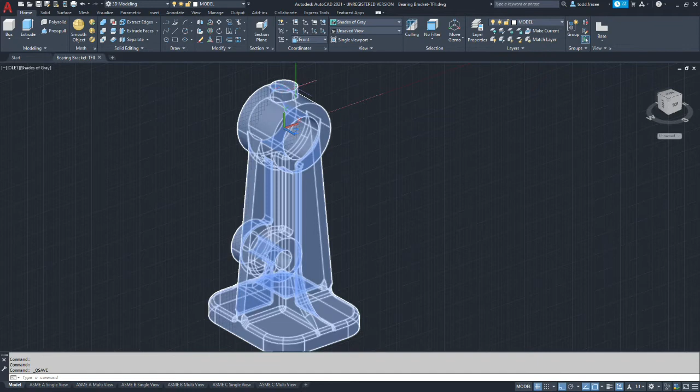Okay, so there are two things we could do. Well, three - we have three sets of features to do before we complete this. There's a hole that goes in the top of this boss, and there's a series of 4 holes in the base plate. And there should be a fillet running around the transition.

I believe I'm going to finish the holes first and address that fillet last, and then we'll do one last attempt at the fillets on the outside. And if we're not able to successfully do that, we're unfortunately going to need to chalk it up as a calculation error in this version of the software, and I won't be taking points off.

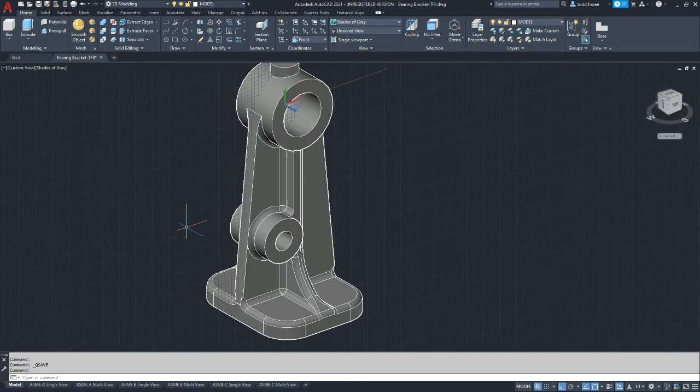Again, we want to be able to describe the part in their different views. So as I have it now, those aren't critical fillets to describe the part in 2 dimensions. The fillet up here on the boss is. So, all right.

Let's finish putting holes in. So the working plane needs to change. We're going to go to top, and I'm going to work on the hole in the boss.

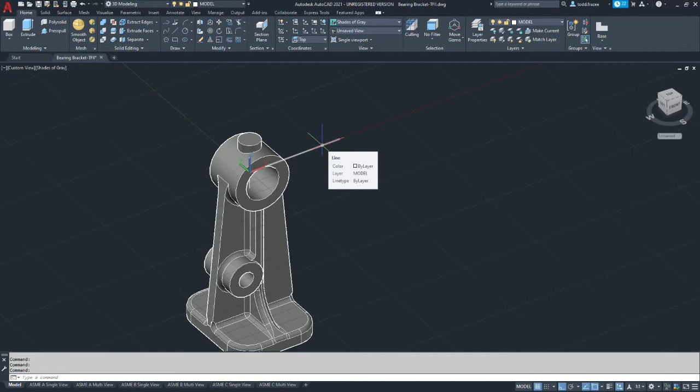Now, it's a threaded hole. It appears it's a threaded hole in the original drawing, but I noticed that the original call out has been just changed to an 8 millimeter diameter hole, so that's what we're going to treat that as. But graphically, it looks like it's a threaded hole. We're going to be covering threaded holes later in the semester.

So, all right, same procedure as what we've done before. We're going to take a circle, and we're going to make sure our object snap is on so we can pick up on the center of the boss. And I prefer to go to diameters, and it's 8 millimeters.

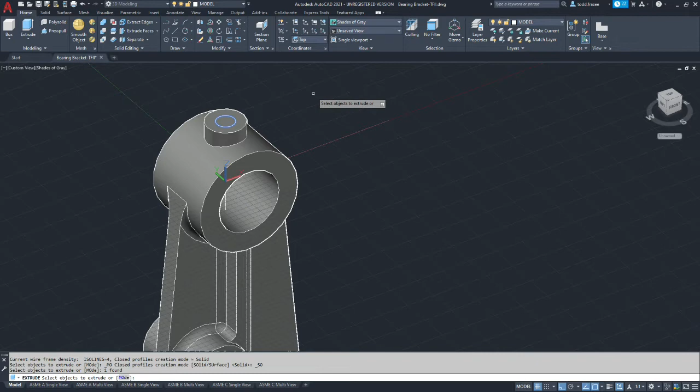Okay, and then we're going to extrude the circle we just made. This isn't critical, it just needs to go all the way through. It's probably for a set screw, so I'm just going to drag it through the part so I can see it go through into the cavity there.

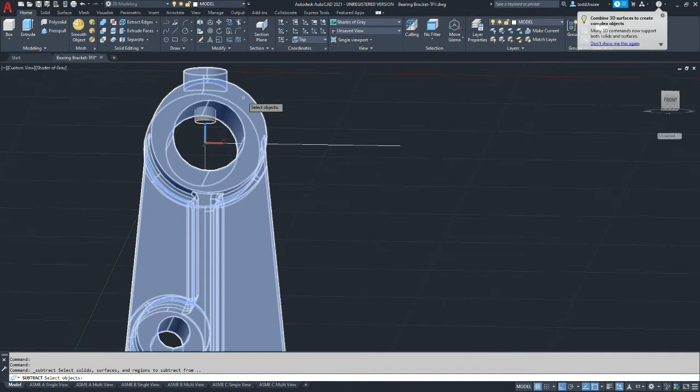We're going to go subtract. We're going to select the solid we want to keep, and we're going to hit enter, and we're going to select the solid we want to remove, and we're left with a through hole. All right, let's go work on the bottom.

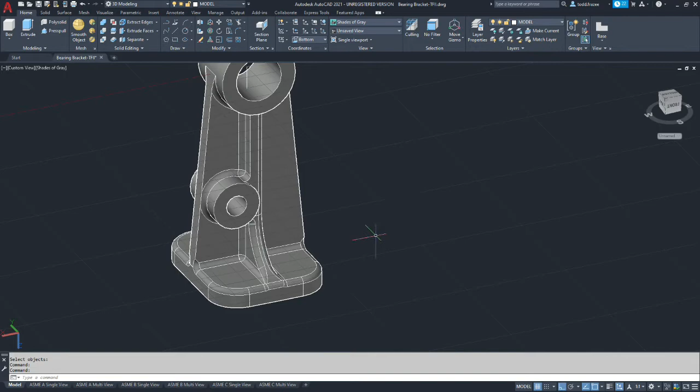Now you can actually switch to the bottom view if you want, or you can operate in the top view. It's semantics on projection, but I would prefer to look at it from the bottom of the base.

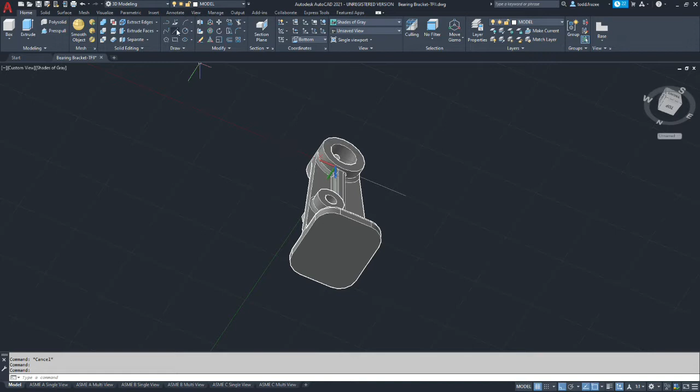We're going to turn on our object snap. We're going to make sure our object snap is on midpoint. We're going to go from midpoint to midpoint, and midpoint to midpoint on the base. Okay, so make sure it's snapped to the model, otherwise your dimensions are going to be off.

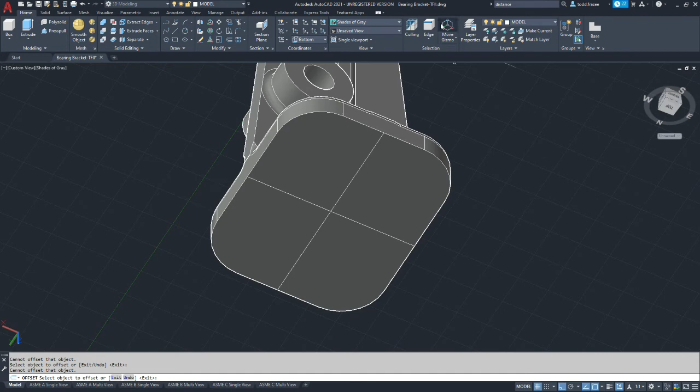Okay, I'm going to switch to wireframe mode. Going to offset. It's 23 millimeters is the offset. So we're going to offset in the shorter direction both ways. And then we're going to exit offset.

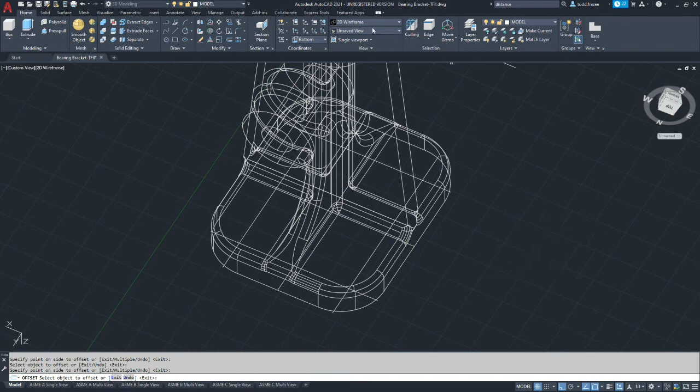We're going to go back in and we're going to set the dimension at 29 and offset the other line that we created in both directions. And in shaded view, this is what we should have. So the intersections of this rectangle that we've created should be the centers of our 8mm holes.

Alright, so on your object snaps, we want to make sure that we have intersection selected. I'm going to deselect midpoints so we don't accidentally get midpoints, and that should be good for now. We'll see how that works. So we'll go to circle, and we want the intersection, first intersection, and we're going to go to diameters, and our diameter is 8. And we repeat that same procedure.

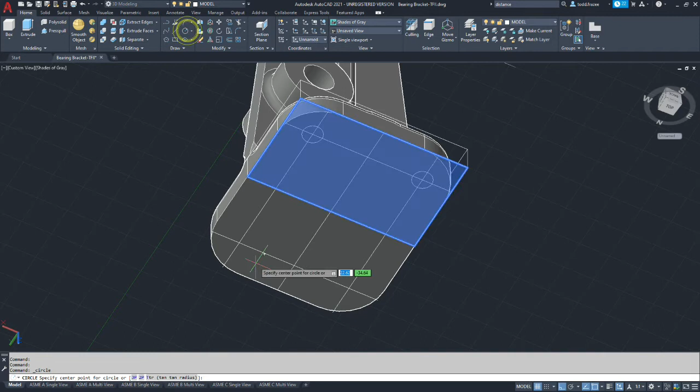All right, so we have our 4 circles. Now for house cleaning, I'm just going to go ahead and remove the extra geometry.

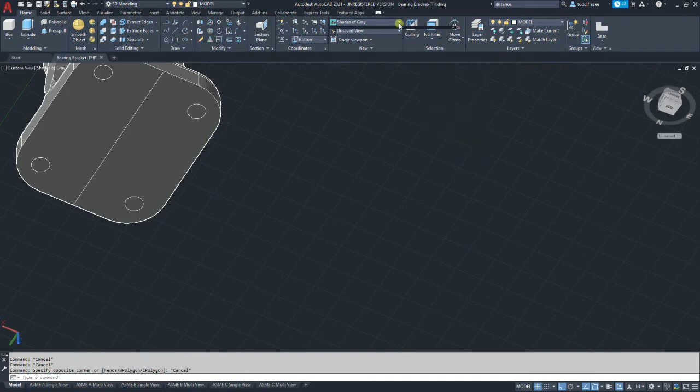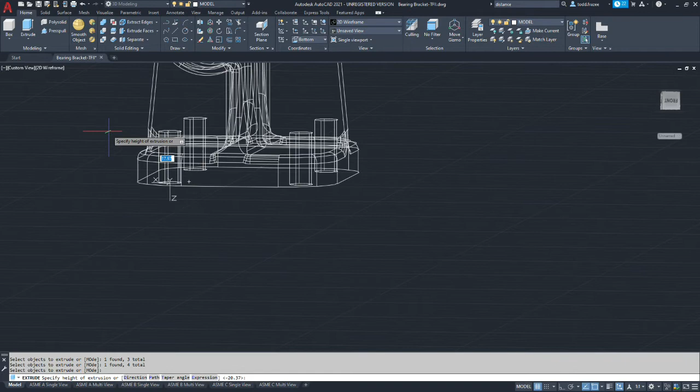And we're going to extrude each of the 4 holes that we're looking at here. And we want those to go through the part. Now our base flange is 11, so let's go 12.

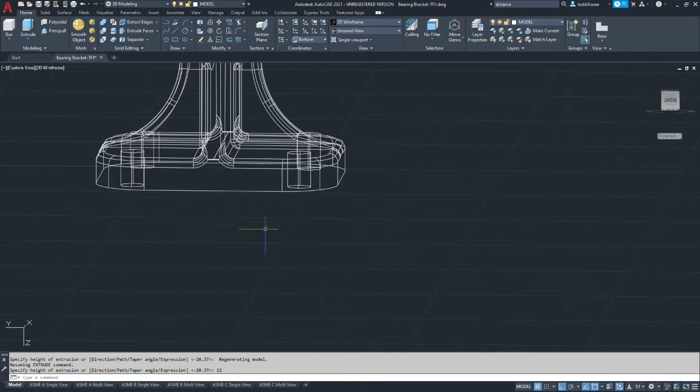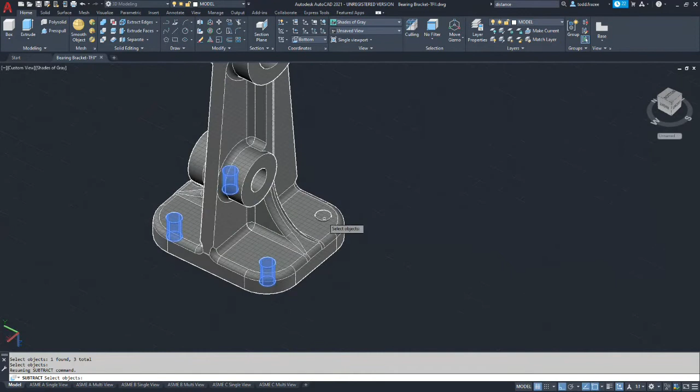Okay, and we're going to go back and we're going to use our friendly remove object. Subtract object, so we're going to keep the main model. We're going to hit enter and we're going to select the 4 cylinders that make up the hole pattern and subtract that material.

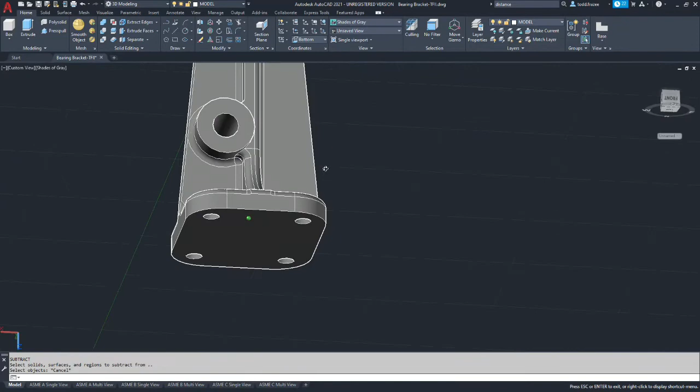Alright, so that's all our subtractive work. Now the last feature to do that we haven't attempted is the fillet here at the top, and then we'll give a college try to do the fillets on the sides one more time before we say uncle on that.

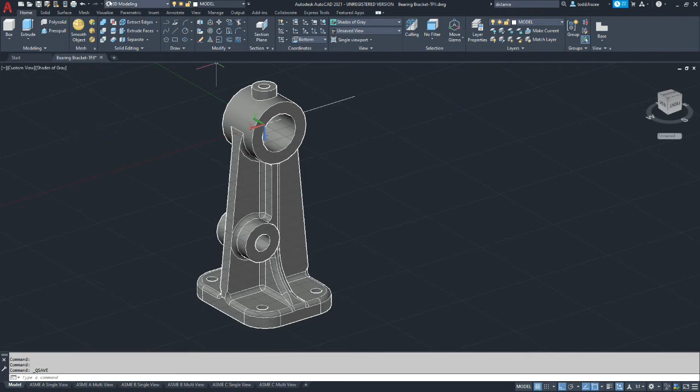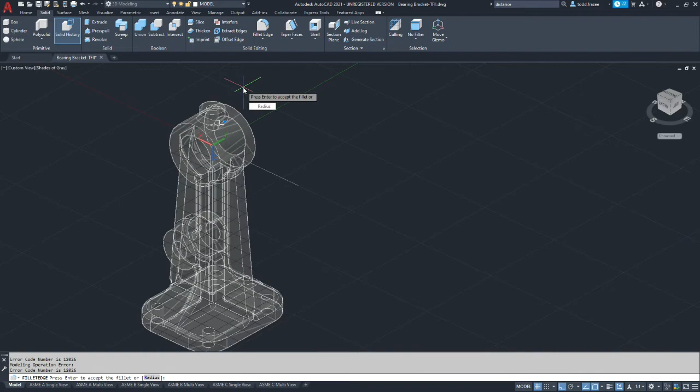Okay, so we're going to go back to solid, and our size should be 3mm. And we select the pattern and my graphics card flips out. Enter and enter, and it looks like that at least that fillet worked properly.

Let's save, and let's give one more attempt at these fillets on the outside. And again, I may have done something procedurally wrong in the beginning. If you were able to establish that when you've established the fillets that go around the base, perhaps that would have been the proper way to do that.

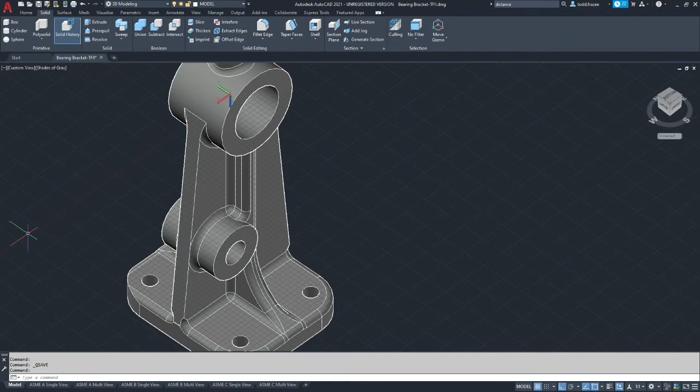I believe it's having trouble calculating this transition here, and this transition here near the boss. But because both sides fail, and we already have a transition here that it's having trouble blending with, we're going to fillet edge, and we are going to attempt to fillet that.

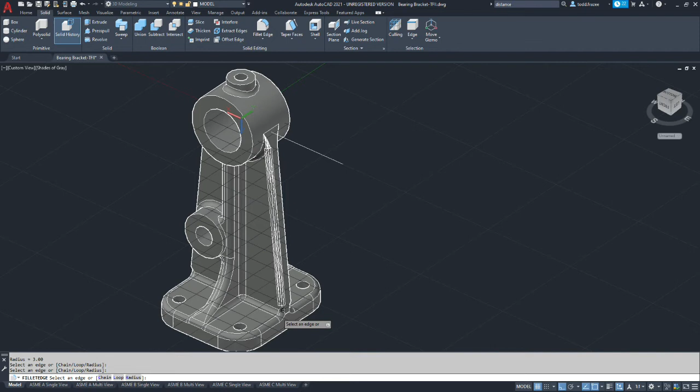And it fails. I'm getting an error code number 12026, failed to perform blending. I've been getting that error, and even on the same fillet that was one time successful, another time unsuccessful. It is finicky on order operations and selecting everything that it can fillet.

When I attempt to fillet this tangency point, it fails. So I suspect it's this transition corner here. It's not able to calculate the math for it. And I apologize for not being able to show you how to do that, but I won't knock any points off for a missing fillet on that edge.

But let's make sure that we try to describe everything in the drawing properly. The purpose of using AutoCAD in this context for this class is to learn drafting, not specifically accurate models. So your end grade for the drawing is going to be based off on how well you apply the drawing standards and have reflected the part so that it can be made.

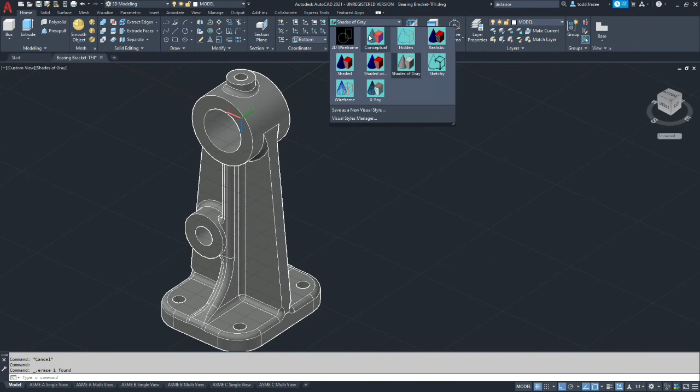All right, so the only last thing is for housekeeping, I would get rid of my original construction geometry so that it's not something we're going to have interfering with our view placement, views and such. There's other ways to handle this. You could put it all on another layer, but when it comes to models, I tend to like to have the model clean when it's all done.

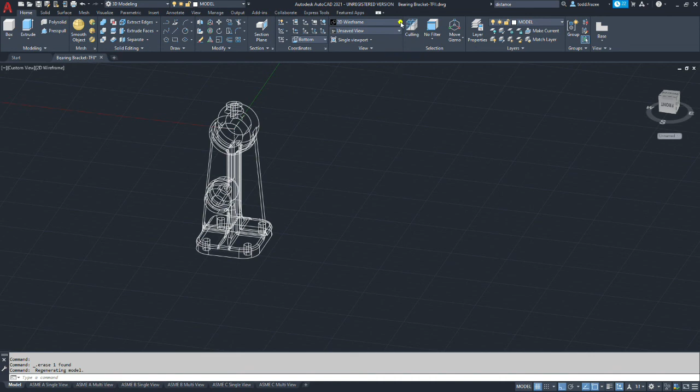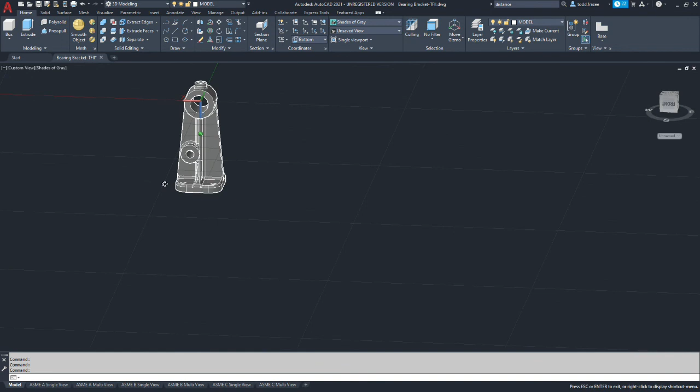So your model should look something like this, and besides the fillets, I am going to be looking at dimensional accuracy of your model and making sure that it's complete and everything's there. I did not attempt to do the fillet here. I think in reality that would be a partial fillet, because this part is the model of it after a casting has been machined. So if you're able to wrap that fillet, then good job. Kudos to you.